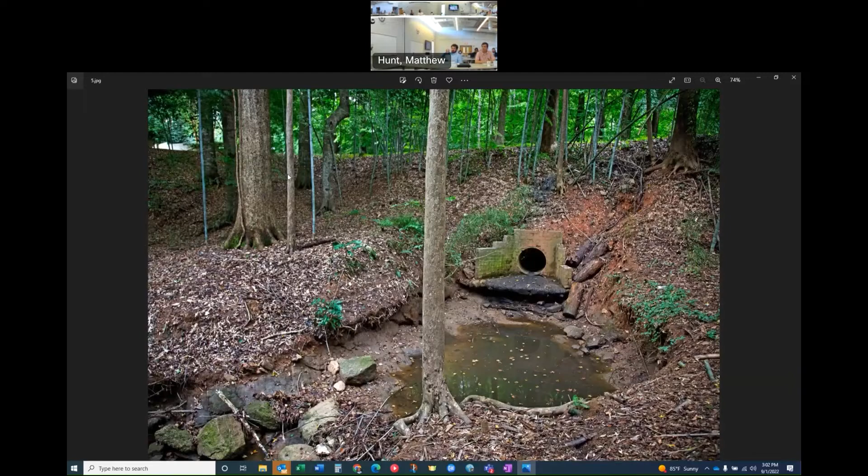The stream banks, as you can see, are experiencing major erosion and washes into Valley Lake as sediment. In 2007, we passed the hat and raised money to dig out a lot of the sediment and construct a silt pond. While that helped, we still have major problems with sediment filling up the south end of the lake.

This is just what used to be a small creek that fed into the lake, has become this torrential wash in the rain events now, and it's washing these banks into the lake.

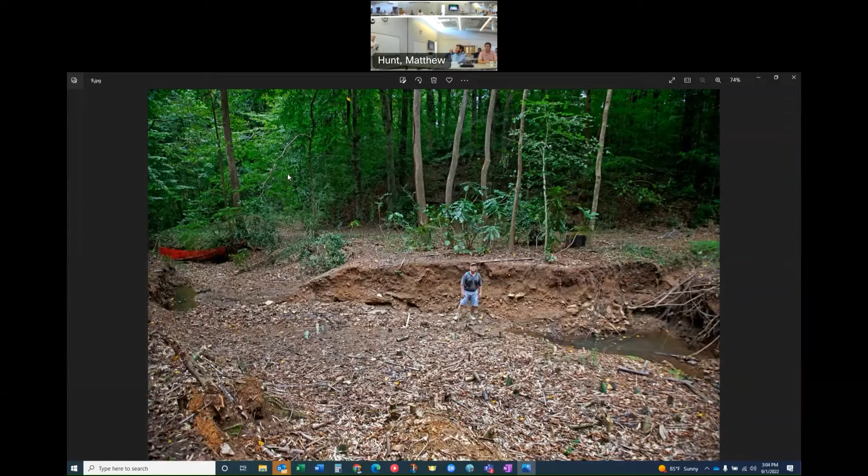I first started asking for the city's help in 2015, working with engineer Robert Kirkpatrick. While we were able to get on the city's radar, the stormwater policy changed in 2016, and our situation was considered too low priority to receive any immediate help.

In 2018, I was able to get a group from the Stormwater Division, including Wayne Miles, to come take a look. Wayne saw the need for help and had some good ideas. He suggested I contact Dr. Barbara Doll at NC State, an engineer, professor, and extension specialist who might be able to use graduate students to study and design a solution for the severe erosion.

Two years later, we received a thorough 38-page study and design solution done by Dr. Doll and her grad students at no cost. That project would have probably cost $10,000 to $15,000 if done by the city or private engineers.

This was Wayne's idea to help find an efficient solution and hopefully get us into a future program the city was developing for stream bank stabilization. Now that that program has come into fruition, we hope to be included and one day get help from the city of Raleigh to stop the impact of all the erosion and the silt building up in Valley Lake.

The lake catches and controls hundreds of thousands of gallons of Raleigh stormwater that benefits North Raleigh. We also hope to qualify, even though one of the requirements of the program is paying the stormwater utility fee. The lake does not, but each of the 83 families that belong to the lake do.

We also hope the priority scoring will take into consideration how devastating it is to have the sedimentation filling up the lake. Thanks for your time, and I hope the city of Raleigh will be able to help us one day with our stormwater issue.

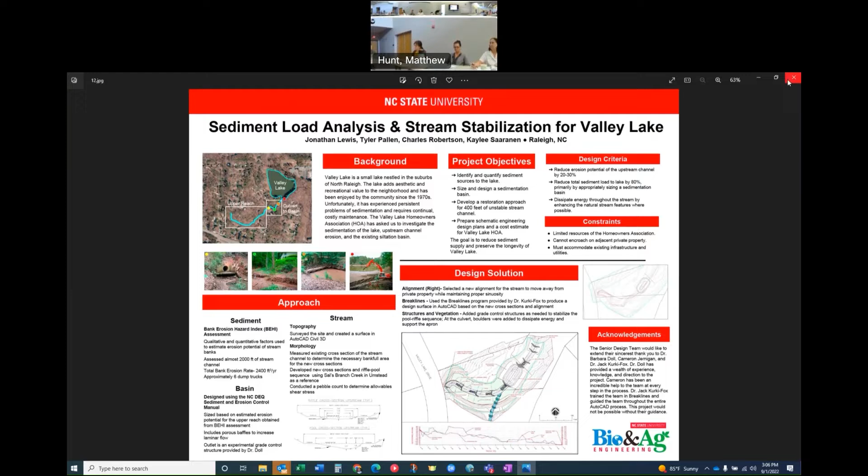Mr. Chair, just one contextual comment. The 4 o'clock item on the agenda that Chaz will be presenting concerns policy changes related to drainage assistance and stream stabilization. That's the item Mr. Wells referenced, where one issue was a property that under the old policy would not qualify because it didn't pay a stormwater utility fee. The only reason it didn't pay that fee is it lacked enough impervious area to qualify. But under the rewritten policy, it would qualify for the stream stabilization policy. Just context for that upcoming agenda item.

Okay, all right. Any other comments, public comments? None that I'm aware of.

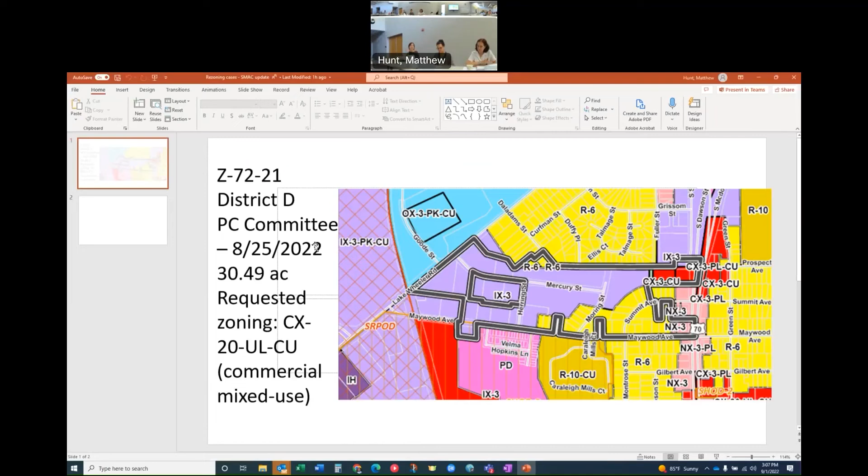Okay, Wayne? So the first item I'd like to mention is, in Commissioner Hill's absence, I'll give the Planning Commission update.

There are two rezoning cases in the Walnut Creek watershed that I think would be of interest to SMAC, given their size and proximity to downtown South and the Walnut Creek area where we know there are some flooding issues.

The first one is Z 7221. It's in Council District D. The map is shown here. As you can see, it's near the intersection of Lake Wheeler Road and Maywood, just to the east of the farmers market and south of the Dix Park vicinity.

It's a fairly large rezoning request, about 30.5 acres. As you can see, there's a mix of current zoning, including some mixed use and residential 6. The requested rezoning is CX20UL, a commercial mixed use designation. My understanding is that 20 refers to a maximum height of 20 stories on that property, so some dense mixed use residential or commercial would be allowed if approved.

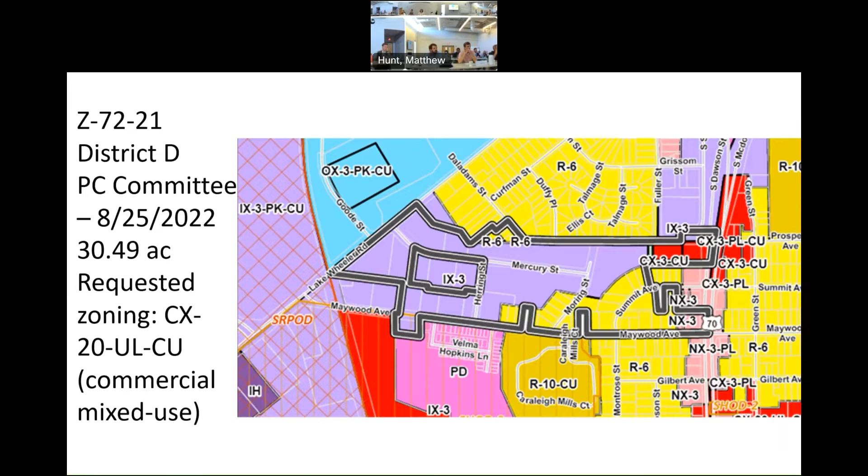I think it's important we pay attention to this one, and also Z 5322. Are you about to talk about that? Yes, we have that one next. Matt, if you could move to the next slide. This is another one in the same vicinity, just to the east of the last one, and you can see the outline near South Wilmington Street and Prospect Avenue.

So this is Council District C and D, also at a similar stage at the Planning Commission Committee last week. It's just shy of 44 acres, and the rezoning request for this one is from R6, which is the yellow, to an RX5 UL and an RX4. So this is still a residential density that's being requested.

It would just allow 4 or 5 story buildings, more like apartments. There would be a higher density of residential use. And there's a creek running right through that's a forested property. It is totally undeveloped right now.

This one has a lot of FEMA floodplain on it. So as you all recall, under the revised floodplain regulations that the commission was involved in getting passed, there is no development allowed in the FEMA floodplain at all, which would apply to this project because it is vacant.

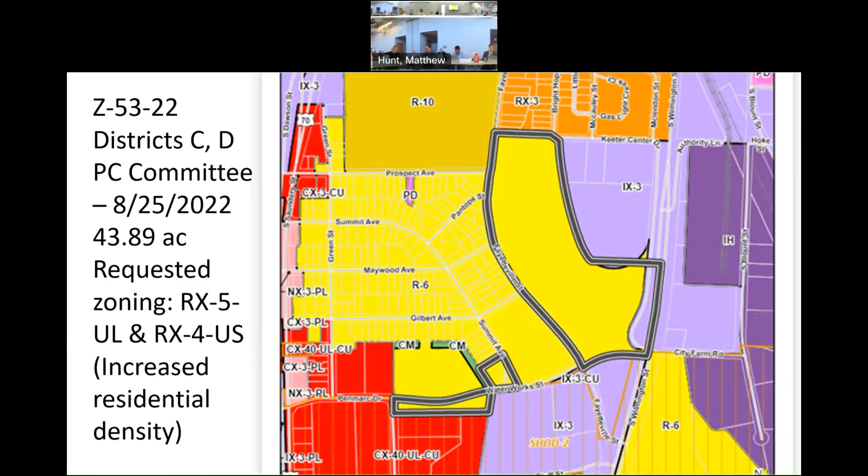We do have a stormwater team update I'd like to announce. George Anagnostopoulos was promoted last month to the Engineering Inspection Support Supervisor position in our Capital Improvements line group. George has been with the city for 15 years. For 9 of those years, he has been in our stormwater inspections coordinator group, overseeing development inspections and erosion sediment control.

He also has reviewed FEMA elevation certificates and was a senior service specialist in transportation field services. George is a certified floodplain manager and a certified erosion, sediment and stormwater inspector. So we're glad to announce his promotion, and that's a very important role for us.

A few more high priority topics. The first is a follow-up from last month. As we mentioned, our stormwater management plan update is up for public comment. That public comment period closes tomorrow, so there's still an opportunity for anyone who wishes to comment, including the audience listening in from the public. That's available on the city's website — just search for stormwater management plan.

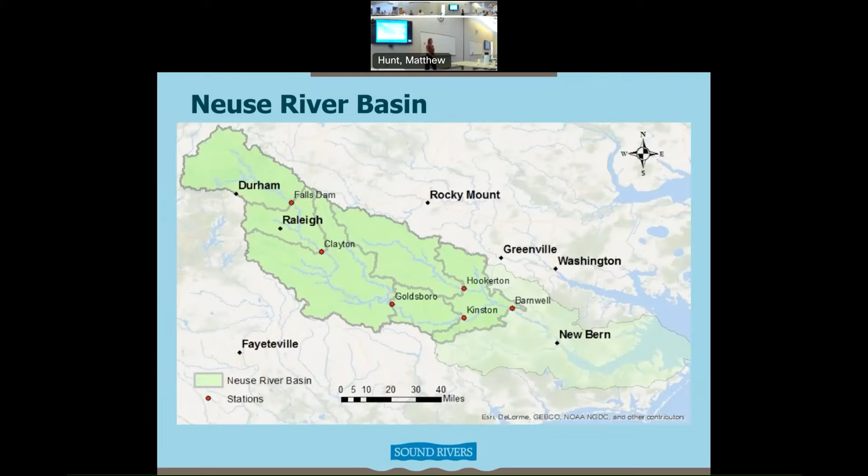And y'all are familiar with the Neuse River Basin, but I just like to show the picture. My job previously was upper and lower Neuse River, it was split, but we actually changed that. So now I'm on the entire Neuse River Basin, and we've added a staff scientist as support, so I've got a lot of sampling support. I don't physically have to be everywhere all the time, but I do work out of Raleigh and also out of our New Bern office. Everything in between, all the way from the headwaters above Falls Lake, down to Oriental, where the watershed meets the sound, that is my watershed.

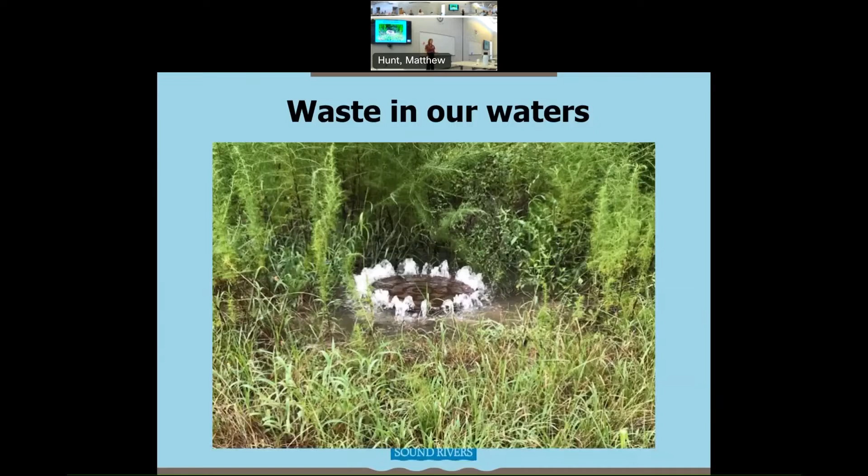Waste in our waters is a big one, something y'all are really familiar with. We monitor bacteria in water, especially our recreational waters. Y'all maybe are familiar with our swim guide program, we're going to talk about that a little bit, but not only from human waste, but also CAFOs. Less of an issue in Raleigh, we don't have those up here, but in the lower watershed this is a big source of bacteria in the water. So we do bacteria testing up and down the Neuse throughout the swim season. And then, like I mentioned earlier, we'll do discretionary sampling. If someone calls in, there's a big flood and these lagoons are coming into the river, or if someone notices something pouring into the river, we'll go out and sample for bacteria there too.

Samantha, please define CAFOs, not everyone knows. Yes, CAFOs, thank you, so bad with the acronyms.

Concentrated animal, or confined animal feedlot operations, basically factory farms. These are places where they've got lots of hogs, swine, with waste lagoons, and that's kind of an outdated practice that's been grandfathered in, unfortunately. With flood issues, this is going to continue until we handle it properly. So that's one of the big areas of our work in the lower watershed, not so much up here.

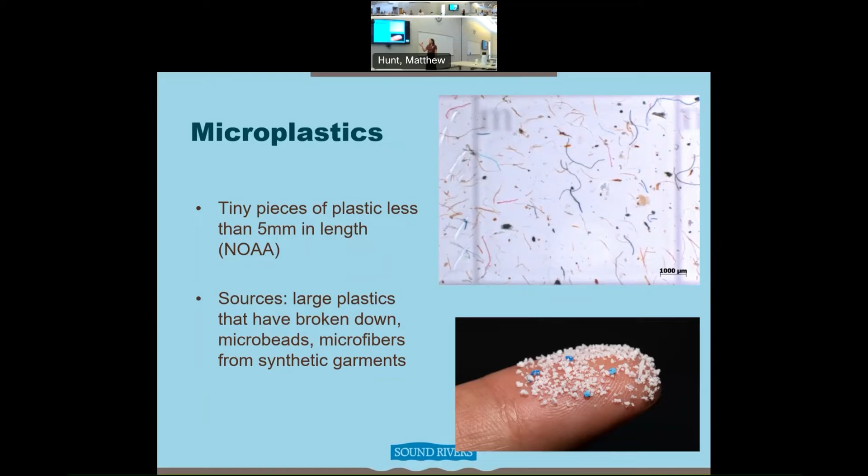We've been actually doing sampling to try and get a sense of how many microplastics are in our waters. I've been doing monthly sampling in Little Rock Creek, and we've been doing sampling in the lower watershed and also in the Pamlico watershed to get a sense of that.

And for the macroplastics, we have really fun clean-outs that we do with the community, sometimes on the water, sometimes on the land. People find all kinds of weird things. It's also a great community-building, friendship-building experience to pull trash out of a river together.

And we're very excited because... anticipation.

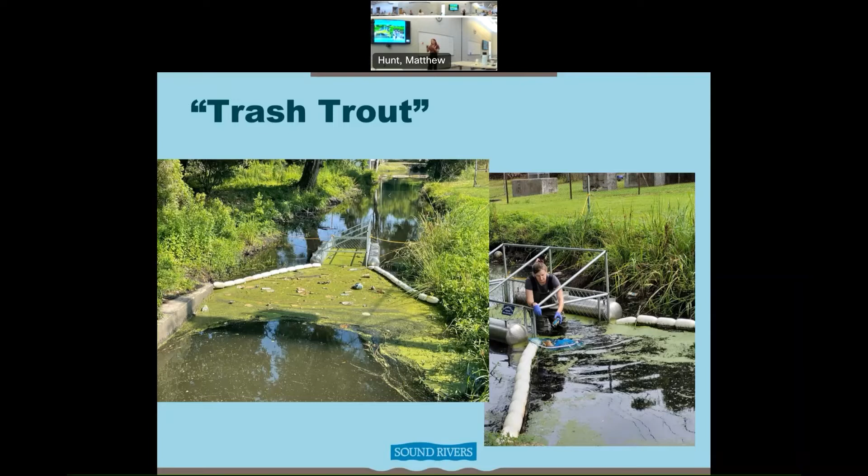So we've got scouts who look at it and we do group cleanouts. It's a good way to get all that trash instead of doing the sporadic whack-a-mole, putting-the-boulder-up-the-hill sort of cleanouts we've been doing. And then some weird things turn up in all the creeks, so you get to see what people are accidentally throwing away, what's washing off into the waters.

Sedimentation and erosion is something I was familiar with from working in public lands before, in forested lands, but the urban issues have been quite new to me. I've been working closely with folks out in Durham County on some development issues. There's an area out there where I think your stormwater work is kind of a shining model for what I'd like to see other places do. A lot of the municipalities throughout the watershed are not as on top of it as Raleigh is with stormwater.

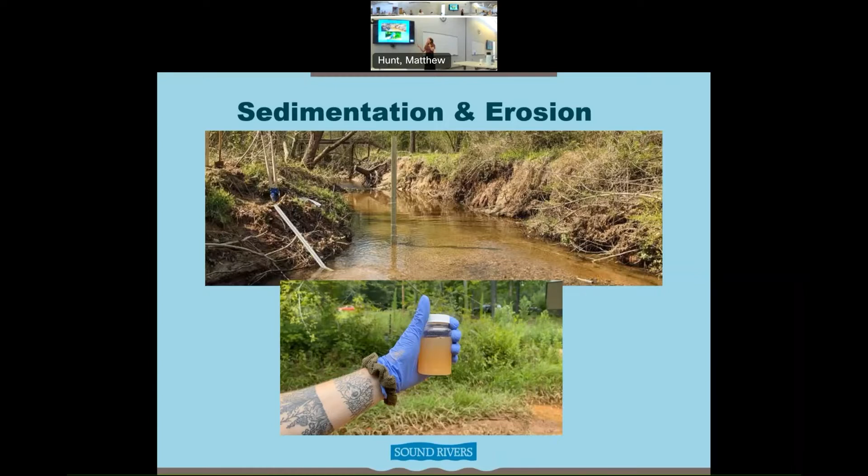There was a giant 280-acre subdivision that would have converted forested area in the Natural Heritage Registry into 650-plus townhomes. That was voted down by the planning board, which I think was a huge win showing there's interest in talking about responsible development and green stormwater measures. But for now, the creek is still running red after every rain.

We're about to get into a protocol of turbidity sampling, and we're going to do some macroinvertebrate sampling to figure out the health of the creek. That will give us good data we can hopefully lean on for more changes in the future.

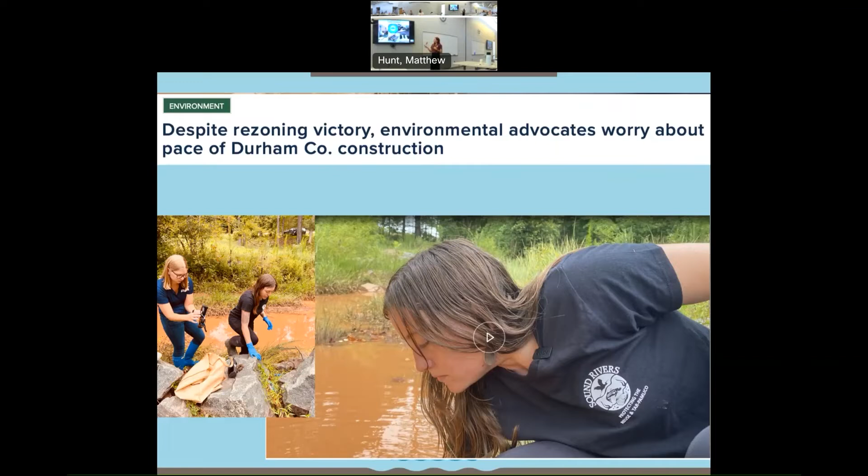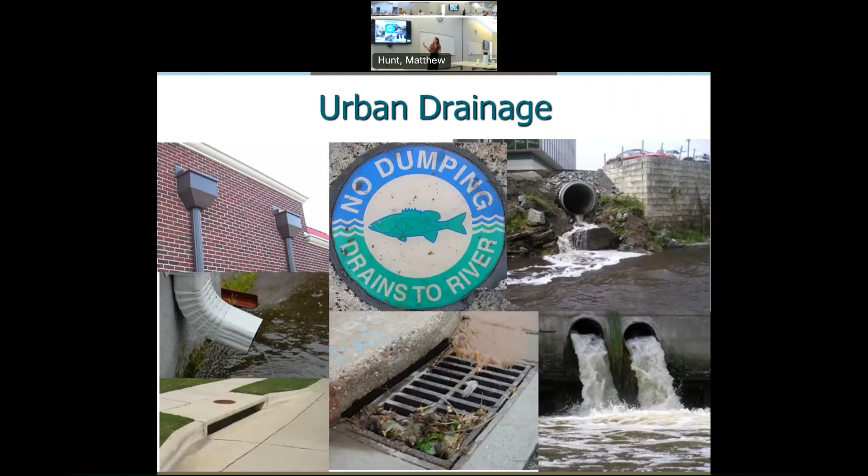Last but not least, this is your bread and butter - the thing that ties all the other things together, bacteria, nutrients, litter, erosion, sediment - it's the stormwater issue. This one is kind of the newest one for me. I'm fascinated by urban drainage now. I can't look at anything in the city without thinking about how the water flows through it, which is a blessing and a curse. But I'm thankful because we've got some really amazing folks on our staff who are very skilled in the ways of green stormwater infrastructure.

We have an entire program in Sound Rivers called the Campus Stormwater Program. What we do is essentially get grants, and then we help community colleges and middle schools implement green stormwater projects. Those can either be retrofits, fixing things that are broken, or planning for future development, putting things in place for smarter future development. We've done over 15 projects since we started in 2011, mostly in the lower watershed, but really throughout both the Neuse and the Pamlico. So we're really proud of them.

A lot of cool things like this - we've got rain gardens, cisterns, really just whatever seems most effective, floodplain restoration, the list goes on. So that's kind of what we're doing on the green stormwater end of things.

I have here future systemic policy change, just to mention there's another thing we're going to be working on at the policy level, engaging with elected officials out in Raleigh. In 2018, there was Senate Bill 469, which passed under a number of different issues, but at the very end there was a technical change made that made it illegal for local municipalities to pass an ordinance requiring stormwater measures on redevelopments. And that's a problem - I think a lot of folks would agree.

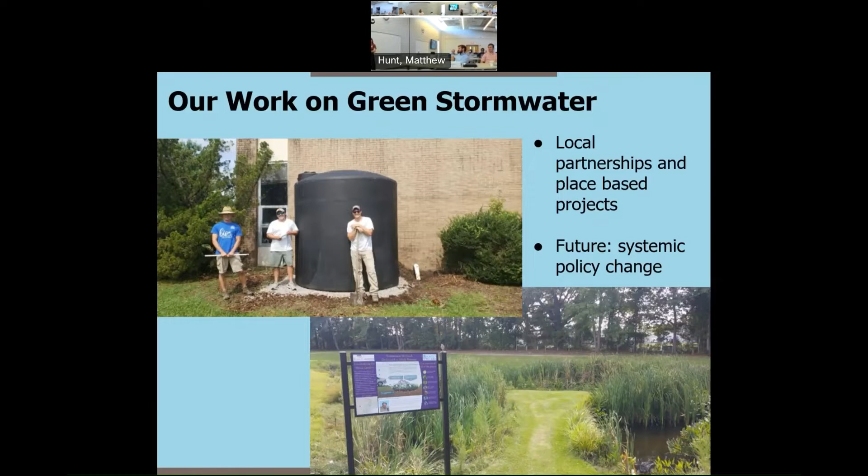We're really hoping to change that little technical alteration, because we'd love to see redevelopments happening - that's kind of the way to go, especially here in Raleigh. We've got a lot of space to redevelop in smart ways, and we'd love to see that actually done in smart, stormwater-efficient ways. So hoping to get more support on that effort as well.

And that's pretty much it. I'm happy to answer questions. I don't know how I'm doing on timing, but that's sort of the run of what we do.

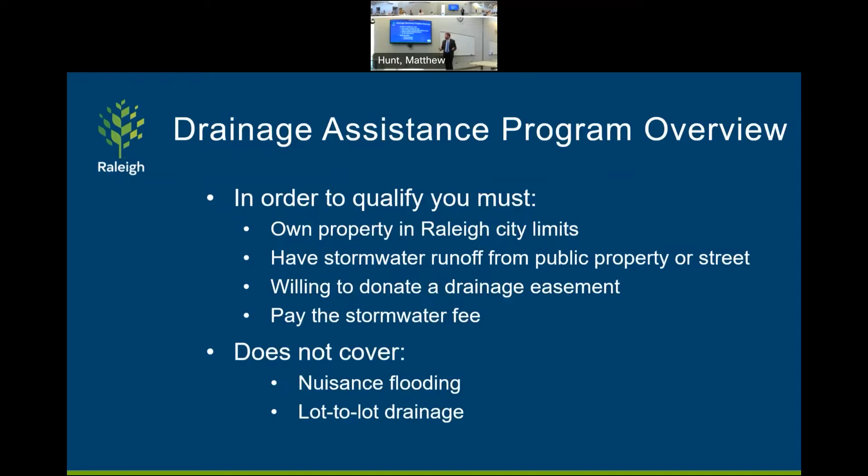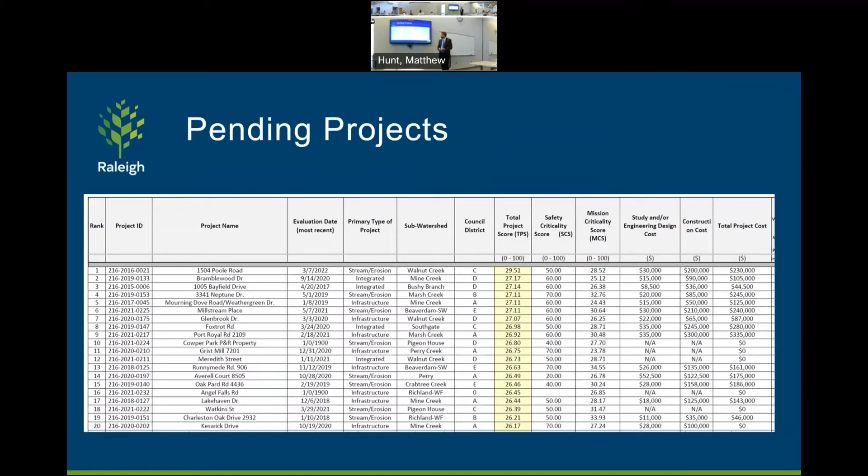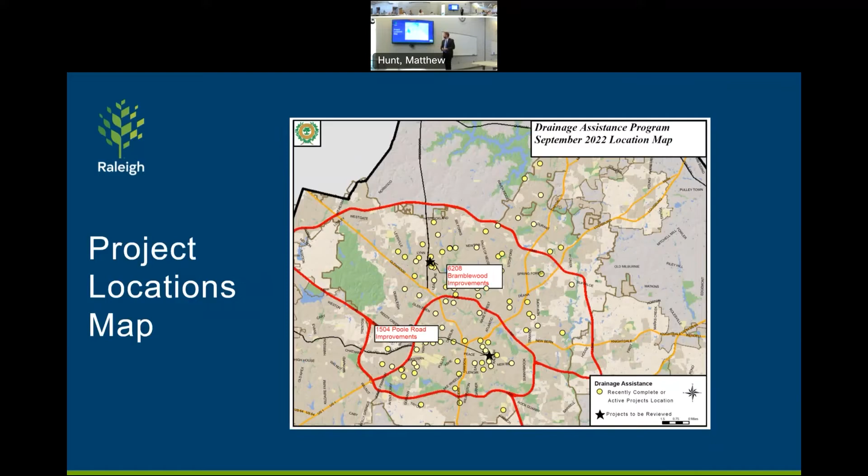We'll be looking at 2 projects today. We have Poole Road, 1504, as well as 5 other properties in the area, and 6208 Bramblewood improvements, which involves 2 projects. The first is 1320, 1402, 1404, 1412, 1502, and 1504 Poole Road.

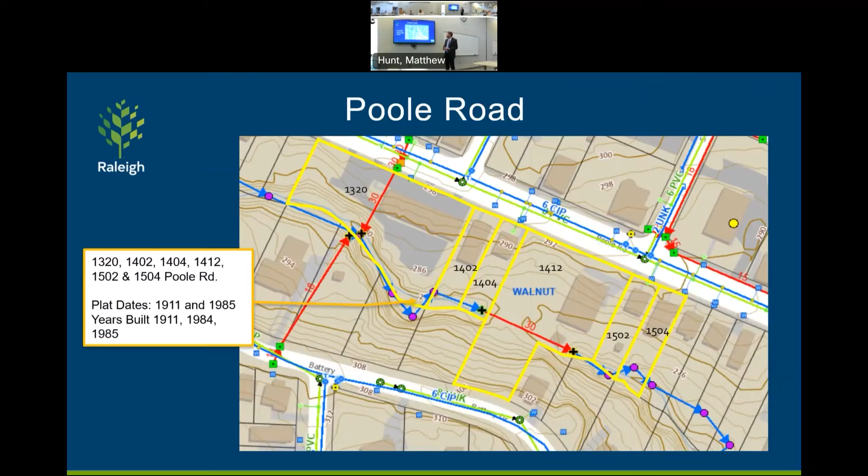You can see it's an older neighborhood on the east side of Raleigh, south of downtown. I mentioned last time that we've got an ongoing project in the preliminary design stages at 1308 Poole Road, a couple of properties upstream. We've halted that for now so we can combine forces to save on mobilization and construction costs.

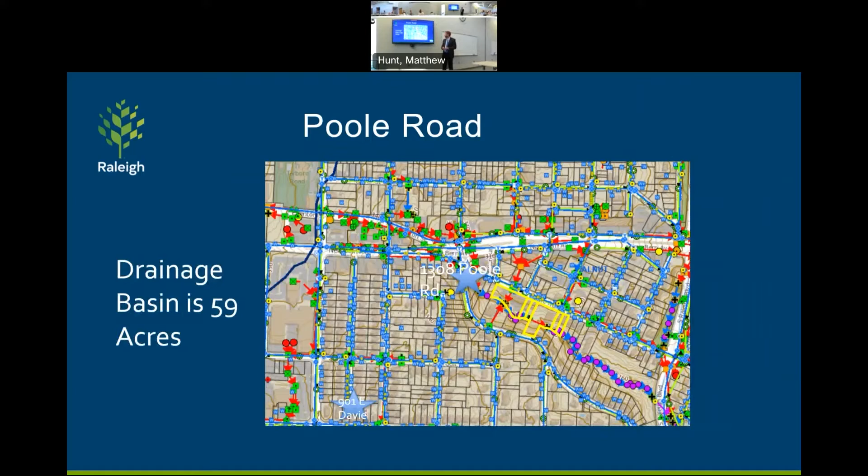So again, refreshing: we have 1320 Poole Road, where we have erosion getting to about 15 feet of a structure. We have 1412 Poole Road—here you can see the pipe, which is really no longer a pipe anymore.

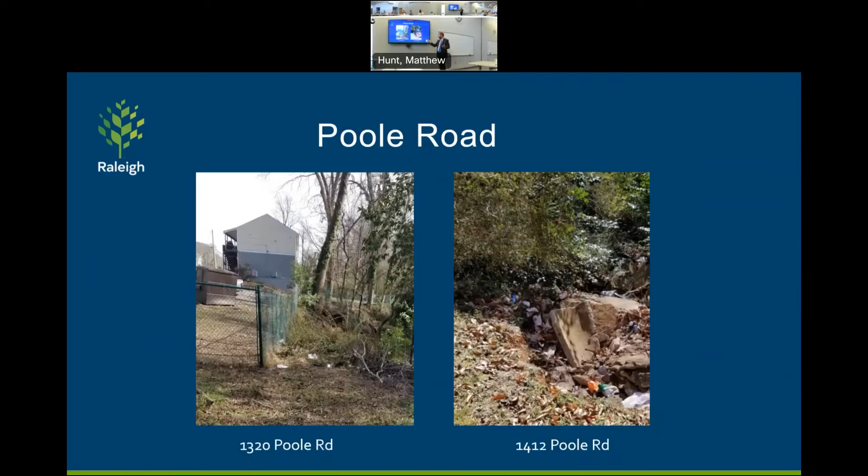We have 1412 Poole Road. Looking at the other end of that pipe, you can see where it's above ground and needs repair. Looking at 1504 Poole Road.

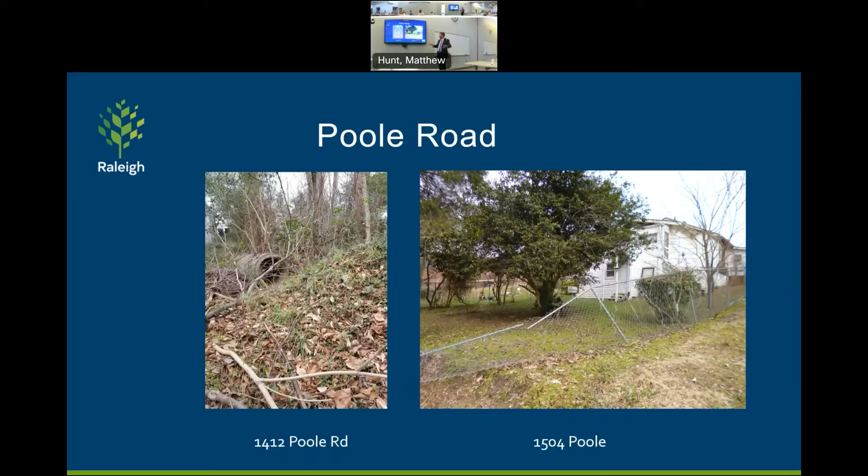This picture doesn't quite do it justice. I'll be on the next slide, looking at split properties between 1504 and 1502—you can see that erosion, significant erosion going on there. And then another picture looking from 1320 Poole Road down to 1402 Poole Road.

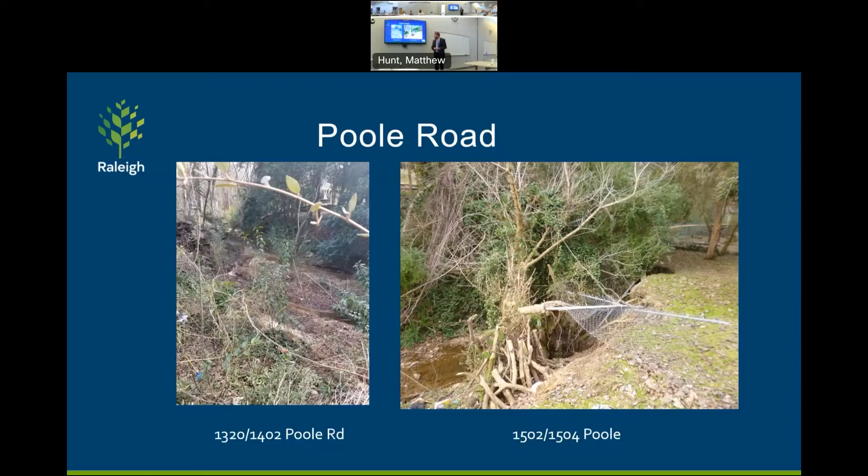So the plan, as mentioned, is to do about 400 more feet of stream erosion work—riprap encroaching on the building, and slope vegetation solutions where possible. Then that pipe that's really no longer a pipe will be removed and replaced with another one.

Again, one of the things we want to do is compare this to past projects. You can see with 1308 Poole Road, a couple properties upstream, the numbers are fairly similar. We've got a number of different criteria in this model—about 50 different inputs—so we're not always going to be 100% consistent, but our staff definitely tries for consistency. You can see for a similar project the numbers, generally speaking, are comparable.

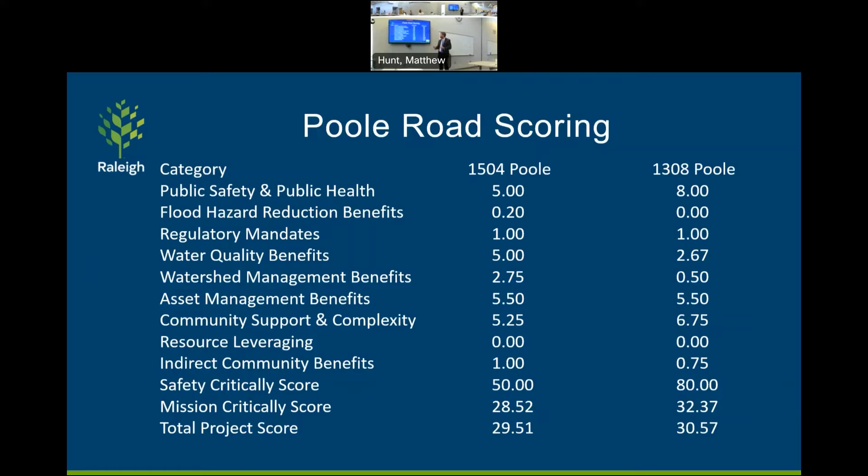We would estimate $30,000 for design, $200,000 for construction, and $230,000 for total project costs. A little conservative, but also taking into account that if we can bundle and combine forces with the other Poole Road projects, that should be a cost saving for us.

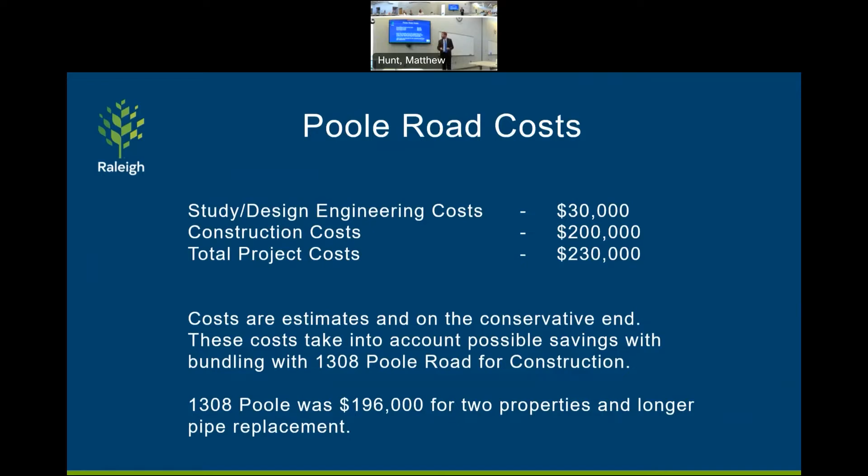So 1308 Poole Road has a little bit longer pipe, 2 properties, $196,000. So let's stop there for questions.

The only comment I had from last month: a little bit north, the developer pulled a rezoning request for that property. I think it's just a matter of time before someone else redevelops that. So how can this be as integrated as possible, so that the work done now isn't negated by the redevelopment that will happen just a little bit north of this proposed site?

Yes, I think that's a valid point. I think one of the things I've heard is that with all the redevelopment that has gone on, the erosion has gotten worse. So we would like to mitigate those issues with some riprap solutions, to make sure that any future redevelopment doesn't prevent us from stopping potential problems.

Do you guys already have ideas or solutions for which side of Poole Road to address the problem? Yeah, we would open cut the section of pipe. This section will probably be riprap, and this section will probably be a slope vegetative solution.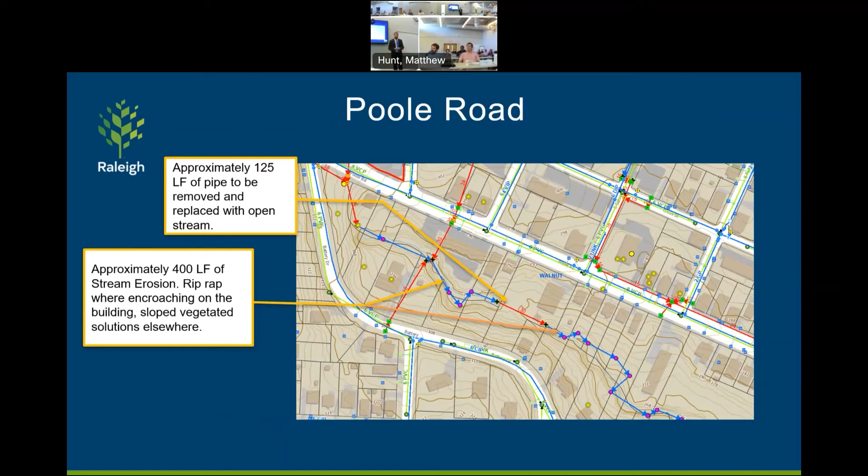So that was that project. I don't know if you want to move on to the next project, or do you want to vote on this project? So we're going to vote on this.

Move to approval. All right, can I get a second? Okay, so we have Mark making a motion, David a second. All in favor? Any opposition? All right, on to the next.

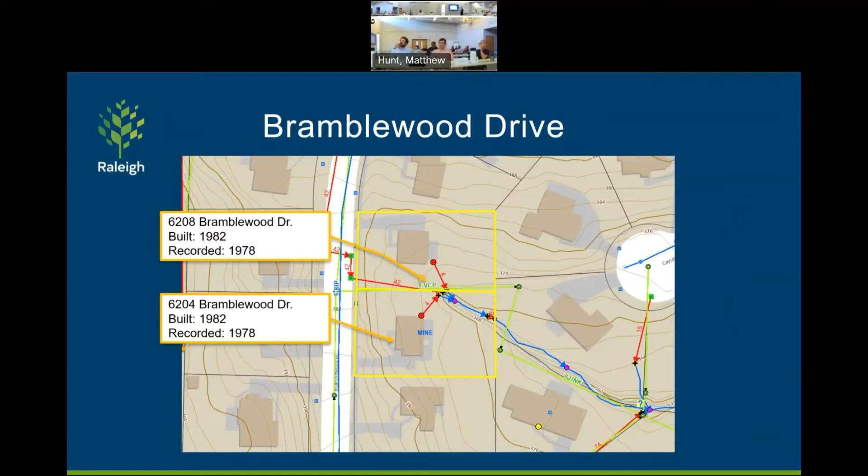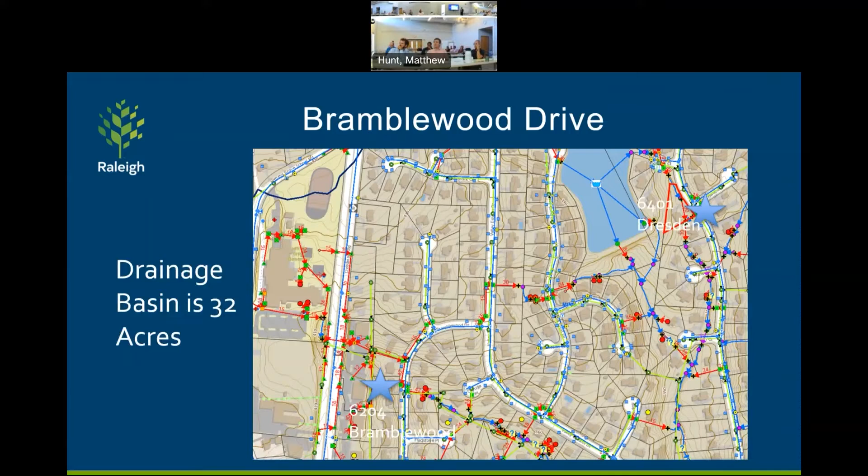We've got some erosion going on here within 10, 15 feet of the building. We've got some sinkholes crossing the property line. We did look at the pipe - we can't line the pipe because of the offsets, so it has to be replaced. We'll look at RCP, reinforced concrete pipe, and then we'll extend the pipe by about 10 linear feet.

I know that came up last month at the meeting about wanting to extend the pipe a little bit. There was some concern about getting permits from the Corps of Engineers as well, so we looked at that. We can extend it up to a point where we have 25 cubic yards of fill within the ordinary high water mark. I believe that 10 feet would get you 2.5 cubic yards, so to speak, today, so I think that would be okay.

So then we'll extend that about 10 feet. We'll remove that 48-inch pipe that was discussed last month, and we'll provide adequate energy dissipation as well, because it was brought up - if you make the improvements here at this property, what do you do downstream as well? So maybe some sort of spreader.

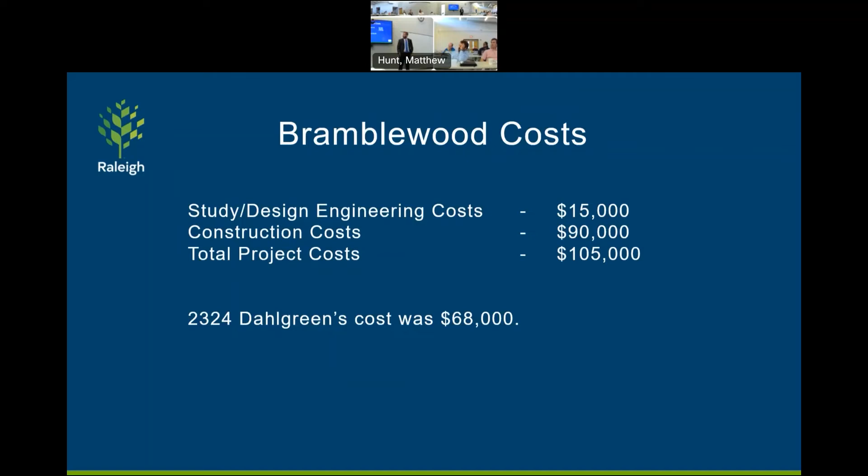Well, I think if you go back to that picture, he's got that erosion in this area, so if you extend that, you're not gonna have as much erosion in that area. Right, it's gonna be kicked down past the trees and into his backyard. That's fine for a couple of years, but we're gonna get a request from the next neighbor. Yeah, why are we paying for that?

The idea is for him to maintain access to his yard. We would get that for the area we would touch, yes. Not extending the pipe, but he's not able to access the other side of his yard. That's correct, that's his concern, access to portions.

The 10 feet came from him, or did that come from you? That was me. Either way, we make sure we extend it up to a point where we don't have to get a permit. Yeah, that's just under the permit limit.

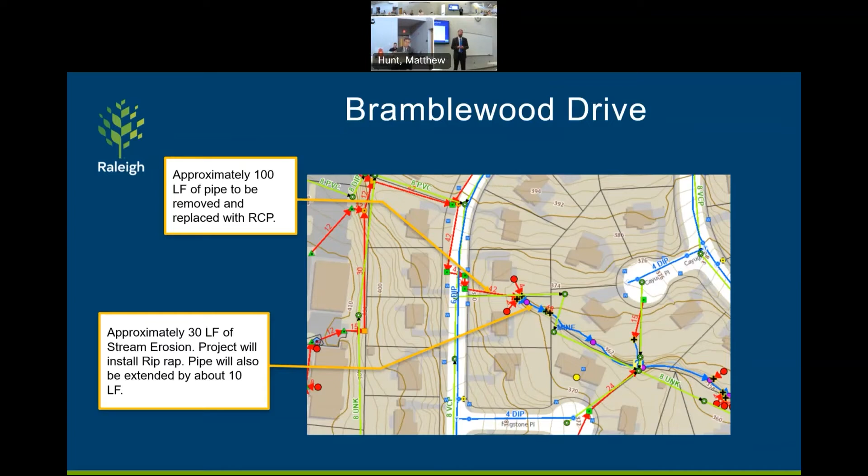So is that addressed in this design proposed to them? Well, we can't ask the engineer yet to look at the design until it's approved by you guys and subsequently the council. But we would tell the consulting engineer all these issues that are on the back of this. You might go into the slide from the deck. I think keep going on.

So he said the distance from the deck to this stream is 15 feet. Is that correct? That's correct, yes. So extending the pipe 10 feet, does it really make a substantial difference in possible erosion that will be closer to the deck?

I think, to what Wayne was saying, it does solve some of the erosion issues within a cost that is comparable. You said it's faster, maybe, I guess that. Okay, all right, he says like 11 feet, so okay.

Can you tell us where the left picture is relative to the right picture? Like, is it looking the other way? Where's the deck in the left picture? Over here, it's looking the other way, so think of it as just rotated 180 degrees. And that's looking... that erosion is in his yard across the creek? Yes, yes, but there's sinkholes on the other property too.

And what is that, or whatever? See that right there, that black line? That's just his landscape edging. And that's the creek on the top left? That's the creek, yes. So you can see it's kind of washed out.

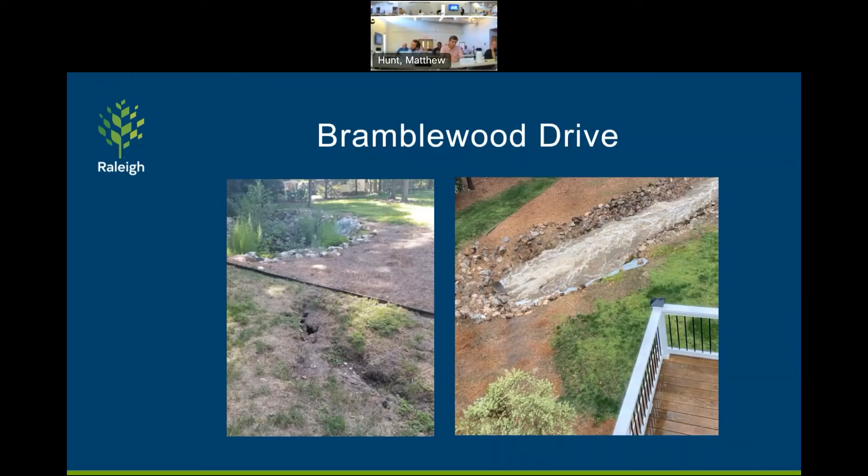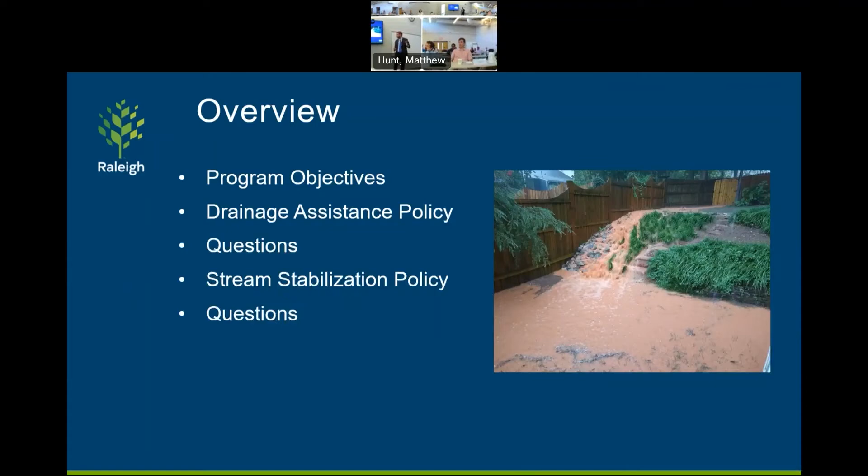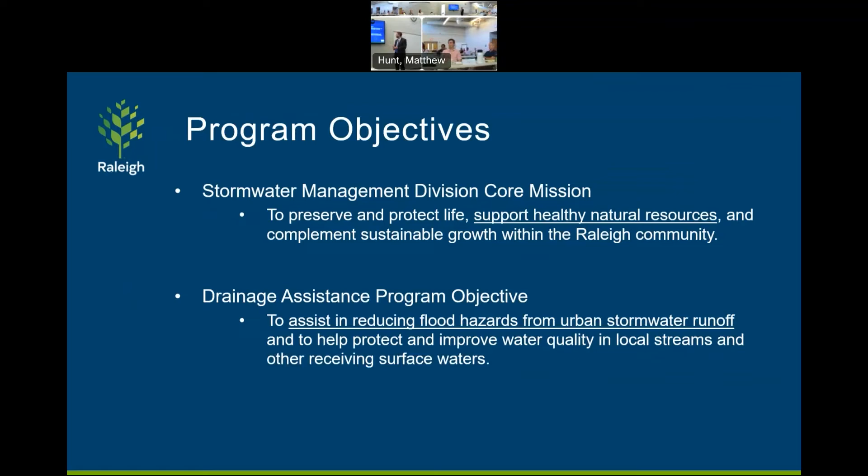We'll cover the program objectives, talk about the drainage assistance policy, then pause for questions, then look at the stream stabilization policy, and then questions again. Again, the stormwater management division is to protect life and help natural resources. The drainage assistance program objective is to assist in reducing flood hazards from stormwater runoff, helping protect and improve water quality in local streams and other receiving waters.

So we're all familiar with the drainage assistance program, obviously. But again, it assists private property owners that have flooding from public runoff. It is a voluntary program. Drainage easements must be donated within city limits. And again, we're small scale. It was brought up before about larger projects and making sure we have all the communities or all the properties involved in a community, but we are a smaller scale program.

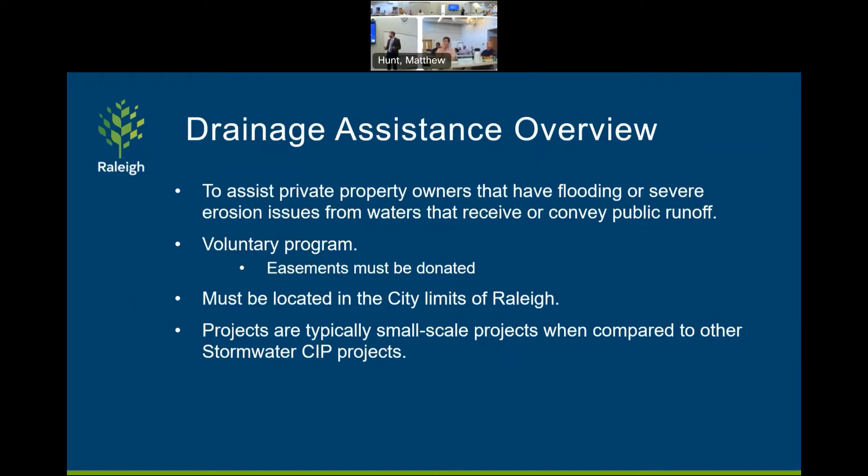So just the timing of the events, to see kind of how we got here: in 2016 the drainage assistance policy was initially approved. Last month you guys took a first look at it, so now we are at the second.

So just to go through the different sections, to give you an overview of where we were initially, these are changes from the original that you saw last month. In section one, that's significant, and on down the list, as you can see, changes from the August revision or the August presentation. We had changes come in section three, which we will go over, but again we'll still cover all sections.

Section two of the previous policy included four definitions. We added permanent drainage easements, temporary construction easements, rights-of-entry, riparian buffer, and intermittent stream and conservation easements. The definitions for severe erosion, structural flooding, street flooding, and the city remain the same. We did not change any of those definitions from August 2022.

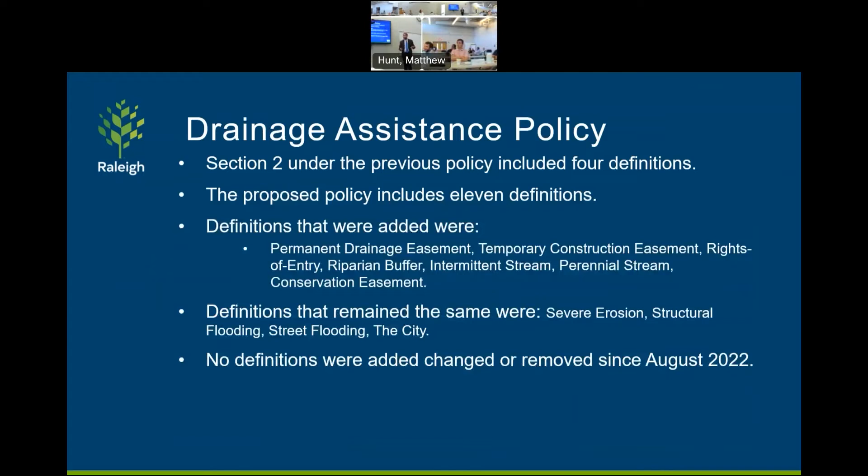So we talked about section 3, which has the changes for eligibility. We touched on this a little bit with the HOA. Now the properties involved are common areas managed by property owners' associations whose members own those stormwater rate paying parcels that are subject to recorded declaration of covenants, which among other things have established the common areas on which the applicable project will be performed.

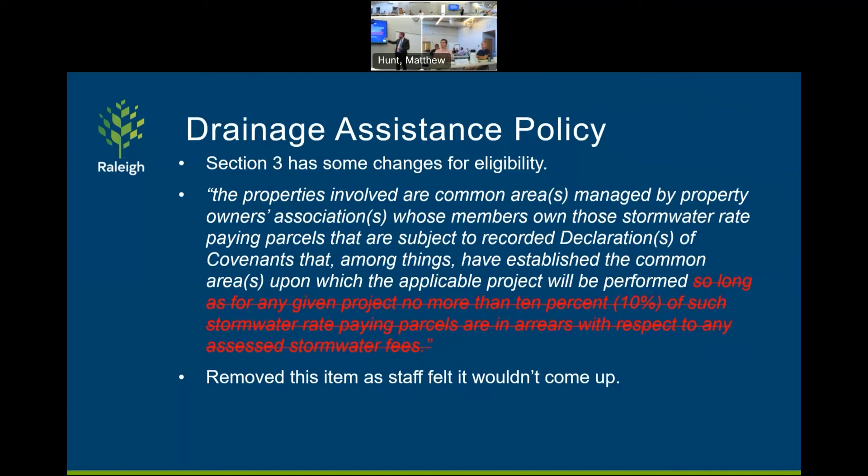One of the comments that came up last month was about the 10% and respecting the privacy of those involved. We decided to take that out because we do have means of collecting money on a delinquent stormwater bill. We've never had an arrears of 10%, so we don't see that being an issue. So that's kind of what this next bullet is, removing this item as staff felt it would not come up.

Section 3 clarifies association with development. Remember we initially had that one-year look back. We decided to change that, from feedback from you guys, to two years, understanding that one year could be too short. So we felt that two years was more applicable.

Design and construction of drainage solutions. Initially it said we'll meet city design standards. We decided to change it to meet or exceed when practical, because we don't always have the opportunity to meet it for improving a situation. We're not always going to meet every city design standard in a situation where before there were stormwater regs on some of these developments.

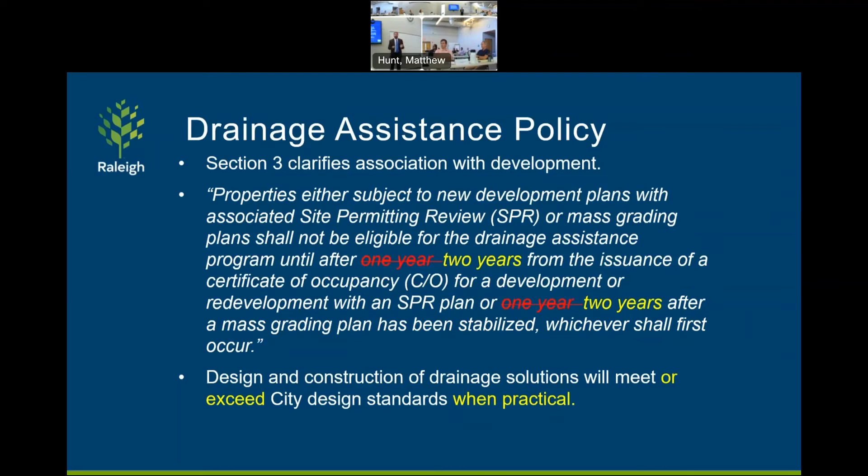No changes to section 4. Again, participation in drainage assistance projects will be based on funds available. No work shall be performed until approved by city council, and before that, this commission.

Again, section 5, we do not have any changes from the version last month. What we really wanted to do was help match the... upon successful completion of the stormwater repair project and upon establishment of the city permanent drainage easement over these repairs, that was the existing policy. We clarified that language with, on dedication of a permanent drainage easement to the city associated with a particular drainage assistance project.

Certain restrictions will apply, and why we have that in there is it kind of closes the door on the ambiguity of saying that you have to delineate easements prior to construction starting. Under the old language, you could technically say upon completion of a repair project, which opens the door for having to delineate easement after construction starts.

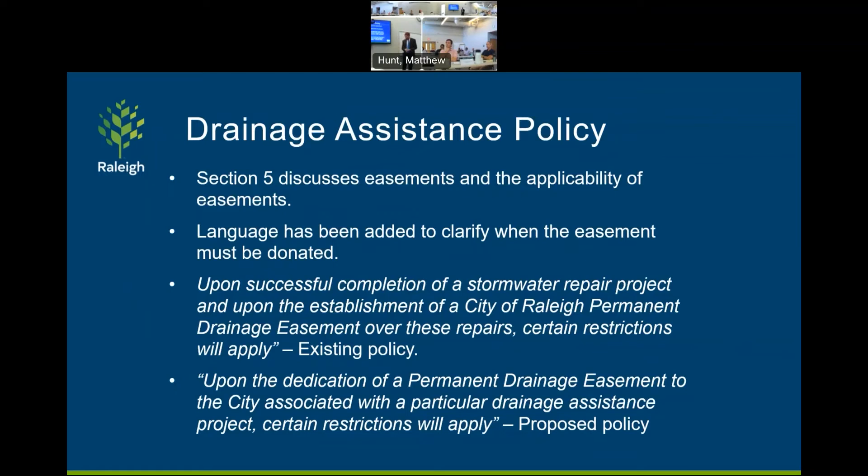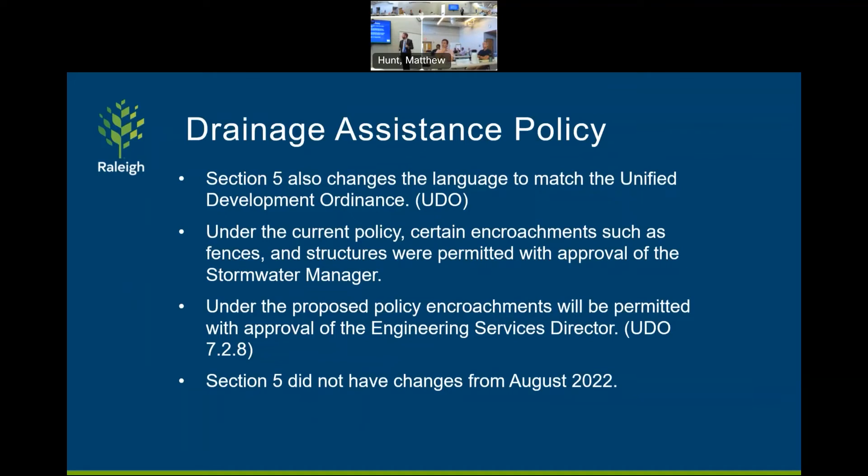In section 5, what we did was we wanted to change the language to match that of the unified development ordinance. Under the current policy, there were certain encroachments that would have to go through the stormwater manager. In the proposed policy, we'd like to add the encroachment to go through the engineering services director so that it is consistent. These did not have changes from August 2022.

Anything for Chaz on this?

All right, so do we need to vote to accept this, then it goes on to council, correct? Yes, sir. All right, may I have a motion to accept the drainage assistance policy? Katie, second. Mark, seconds. All in favor? Any opposition? Very good, thank you.

And we'll move on into stream stabilization. The stream stabilization program objective is to support healthy and natural resources by reducing sediment loss and stream bank erosion, and reestablishing streamside riparian buffer.

Now, we have a stream stabilization policy that is needed to address erosion that will not be covered by the drainage assistance program. You could have projects within the drainage assistance program that have severe erosion threatening the structure. But as we've seen today, we also have projects within the city, and Mr. Wall presented that there's erosion that's not threatening the structure, but there's a lot of water quality benefits to the project.

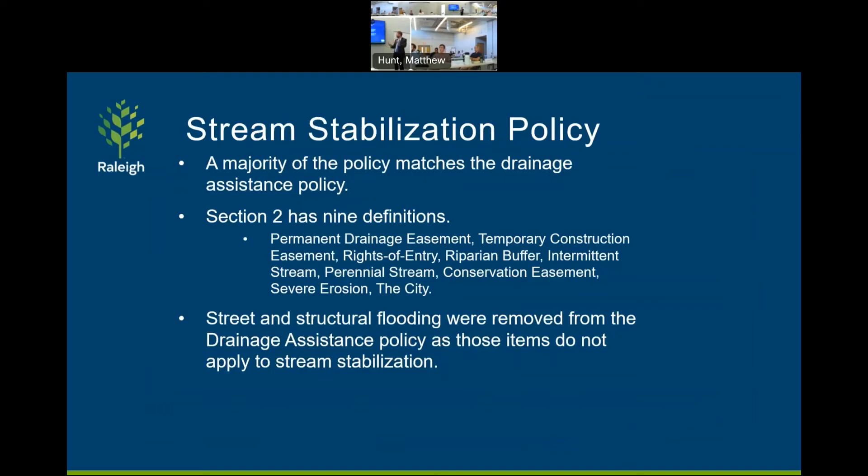The project must provide a 20-foot stream side riparian buffer area to establish a conservation easement dedicated to the city, with stream side riparian buffers measured starting at the top of the bank. We had language stating stream side riparian buffers shall not be subject to utility easements, but that language felt a little vague, so we removed it.

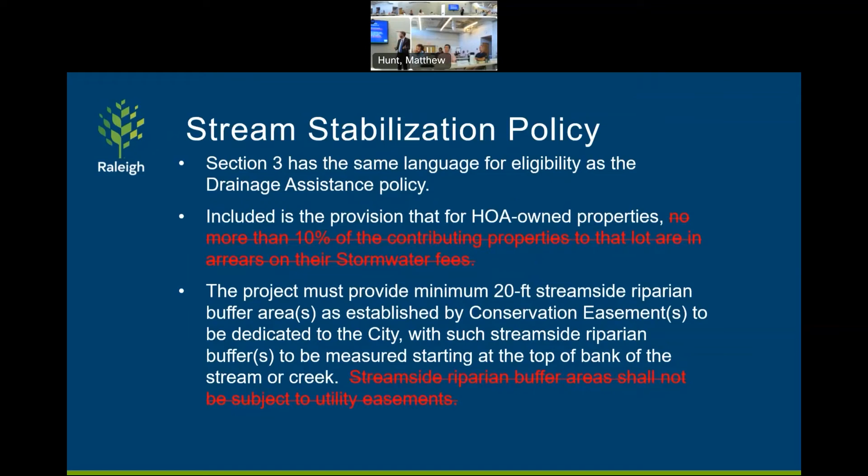Again in section 3, qualifying changes the look back for development from 1 year to 2 years. Section 4 is very similar to the drainage assistance policy in that participation in stream stabilization projects language there says drainage assistance projects, matching the drainage assistance policy.

And then again, we had the language match that of the unified development ordinance so that we're consistent with the rest of the city when people come in wanting to put in fences or anything else. And then I'll pause for questions and comments.

One question - the gentleman that presented earlier talking about their lake, is it a private organization as opposed to a typical homeowners association? It sounded like the wording here still kind of addressed homeowners associations. Would that kind of project, on a separate, non-homeowners-association basis, partially qualify? I think it would - we would make sure to get clarification from legal, but the intent is a commonly owned area with projects or houses in that area that are paying these stormwater rates.

I think the project he envisioned looks like a good project. I don't want to have that excluded just because of the way we worded this here. We would get clarification from them, and I agree with you. The situation applies when people that are part of the organization are all ratepayers, so it's the same thing - it's just a matter of how the ownership is structured, whether it's an HOA or a private entity outside of an HOA.

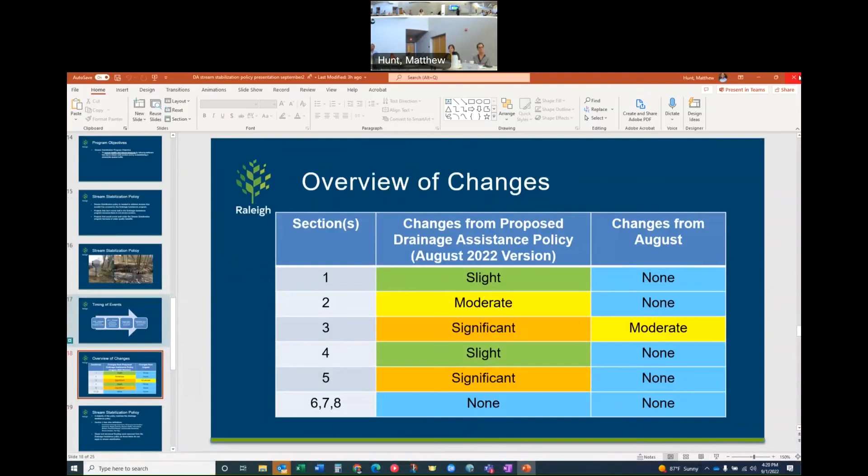All right, thanks everybody. I'd like to discuss the two items in your package. First, we have the annual report from the Stormwater Management Advisory Commission to City Council, a summary of fiscal year 22 through the end of June. I'd like to thank Ariel Bushell for working on this report, interviewing staff across the division, and putting together this nice report for your review. I'll review it briefly.

Right after that, I'm going to review the proposed work plan for fiscal year 23, which will be presented by the commission to city council, and which will be the guidance for the work you'll do continuing through next year.

So where we are in terms of schedule—this is your first look at this. We'd suggest you provide any comments or feedback; you'll still have time to review it. What we'd propose is you send us any changes or revisions. We'll take those today, over the course of the next month, and bring this back to your October 6th meeting. Ideally we'll try to finalize them before that meeting, and then they'll be presented to city council at the subsequent meeting.

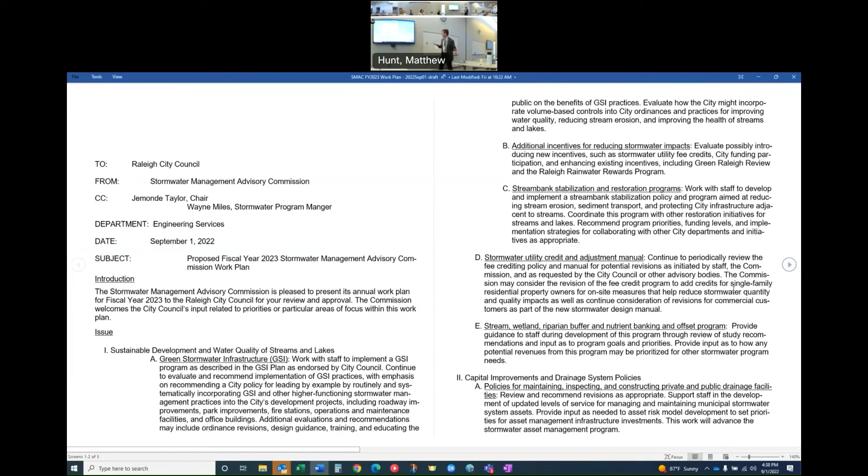So at the top, drainage policy, drainage improvements policy on private property. Policy for public drainage easements that will be maintained by the city. We continue to update and look at those.

The lake management evaluation program, the policy changes are done. The commission was involved in that probably two years ago. So now your ongoing role is where there are lakes that potentially fall under that program, we will bring them to you for review. There is one we're starting to look at right now called Campon Dam.

That is the dam that has received a notice of violation from North Carolina Dam Safety. It is a multiple ownership situation. The city's interest is we have a city street that goes across the dam. So, complicated situation, one that we see potentially could fall under the lake management evaluation policy. We're starting some early assessments on that. Once we have some alternatives available, we'll bring them to you for your review too. But that'll be an ongoing process, and there may be other projects that come up.

Equity considerations in stormwater policies, I mentioned this is going to be an ongoing issue. We've made some improvements to the DA policy in the past, but we'll continue to look at how we can update policies to be more equitable. CIP prioritization model and how equity can be incorporated into that prioritization model is going to be a big focus there as well.